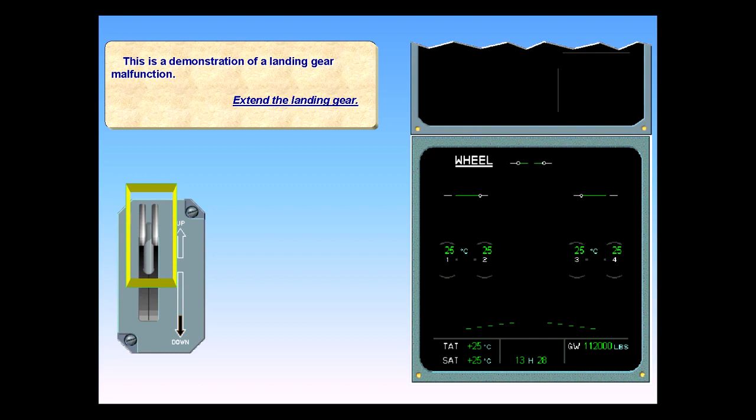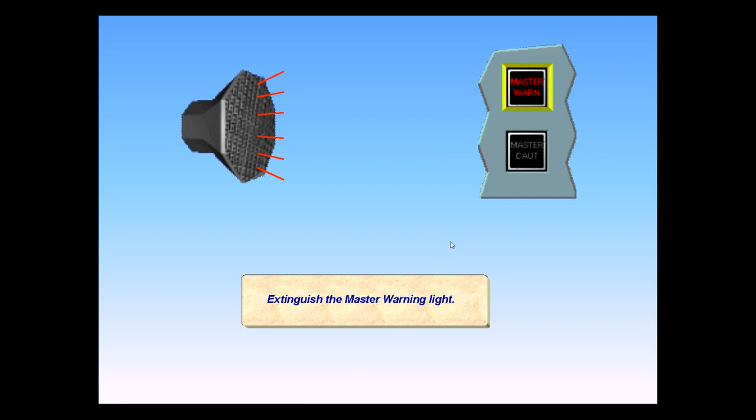Extinguish the master warning light. The left main gear did not extend and lock. On the landing gear panel, the unlocked indication is red. On the ECAM wheel page, the message Landing Gear Control is displayed amber, indicating that the gear and landing gear lever positions disagree.

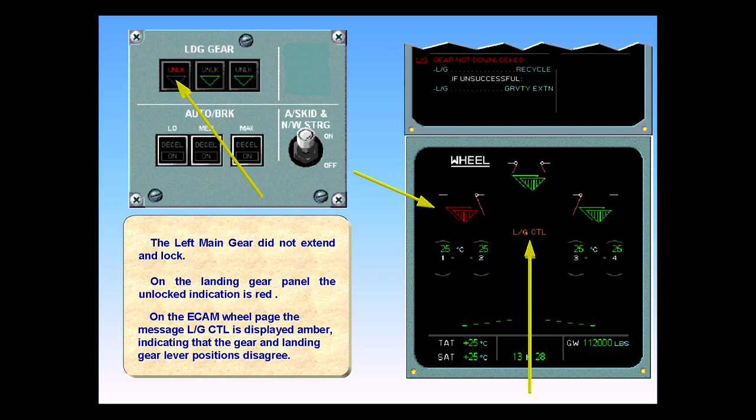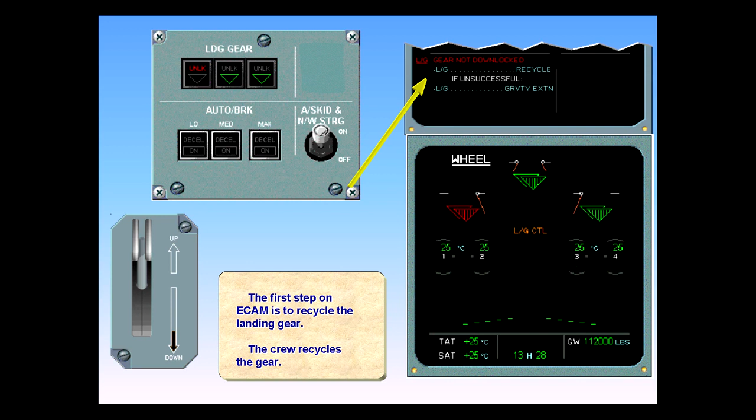The first step on ECAM is to recycle the landing gear. The crew recycles the gear. The landing gear is extended again, and the failure remains. The next action requires a non-ECAM procedure described in the flight manual. Extend the gear by clicking on the gravity extension handle.

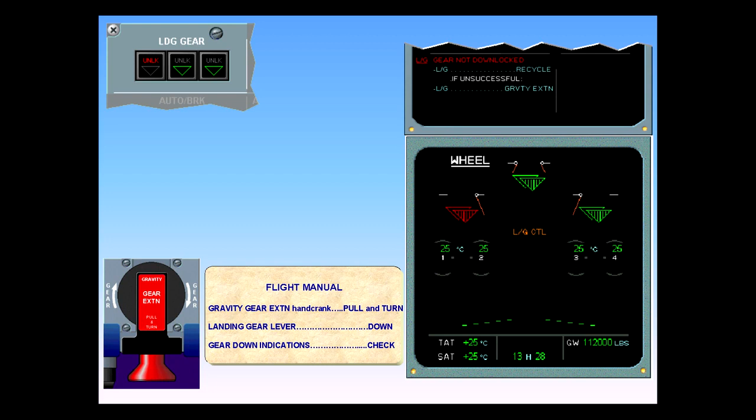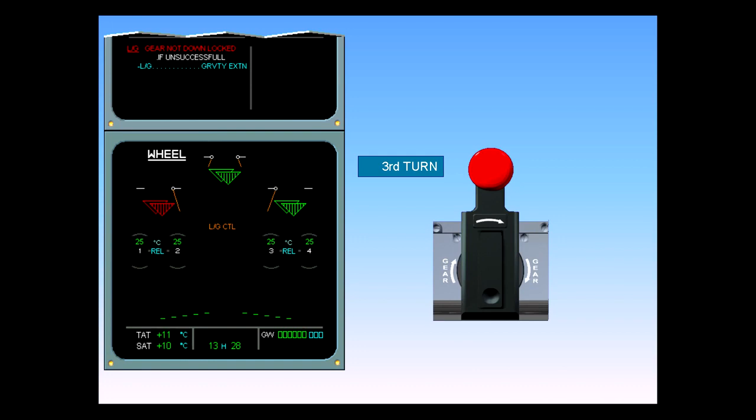The hand crank has been turned 3 times. The next step is to place the gear lever in the down position.

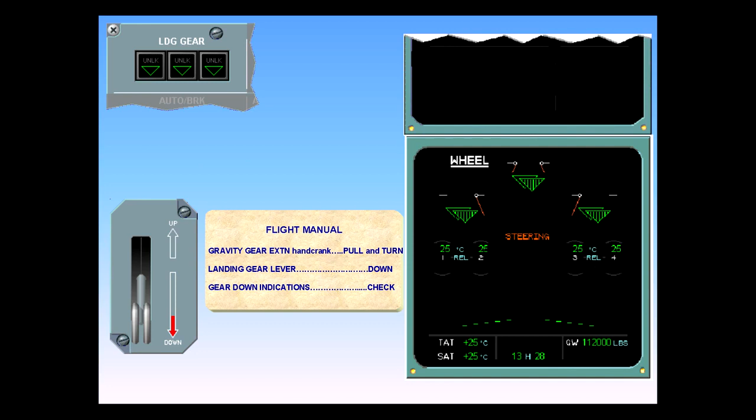Finally, check for gear down indications on the gear panel and on the ECAM wheel page. The gear is now down and locked. Note that the gear doors remain open. This is shown on the wheels page. The door indicators are open and amber.

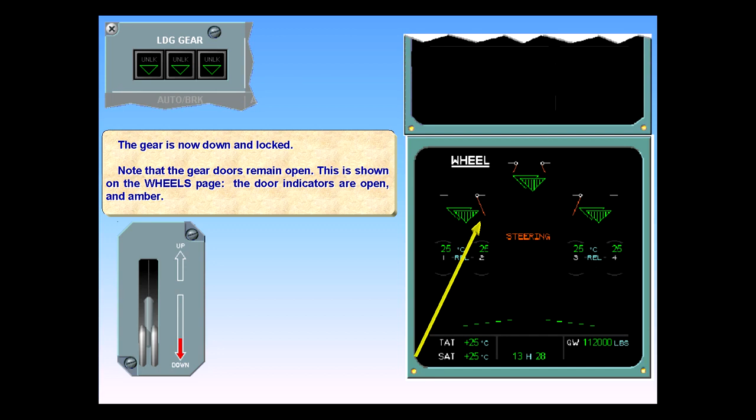The next step is to clear ECAM. Clear ECAM.

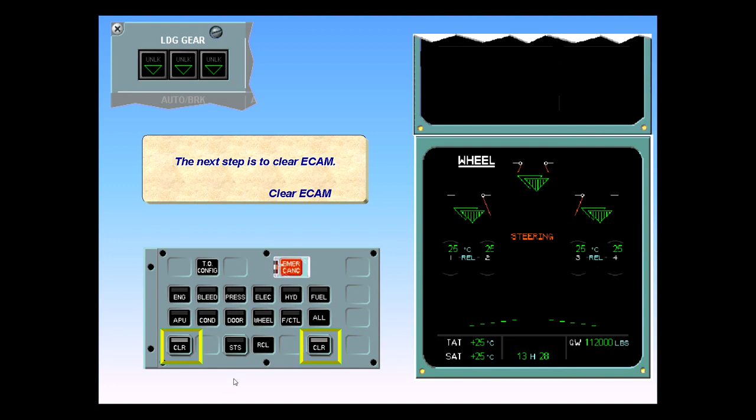The status page is now displayed. Approach Cat 3 single only is listed in the left column, indicating a downgrade in approach capability. Cat 3 dual and nose wheel steering are listed under in-op systems. Anytime a landing is made with the gear doors open, nose wheel steering is lost.

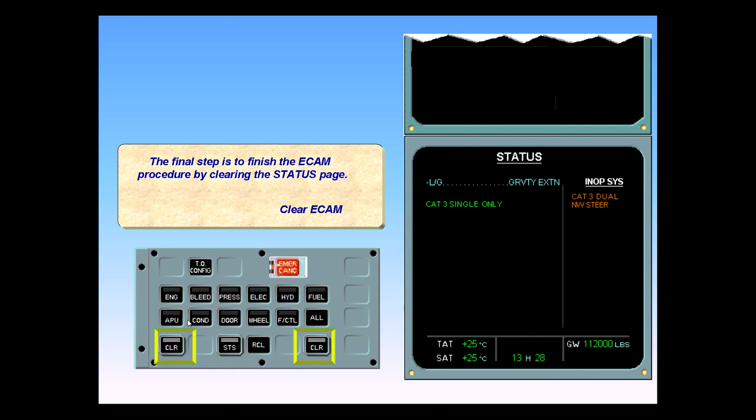The final step is to finish the ECAM procedure by clearing the status page. Clear ECAM. ECAM complete. Screens normal. Notice that the status reminder is displayed on the engine warning display.

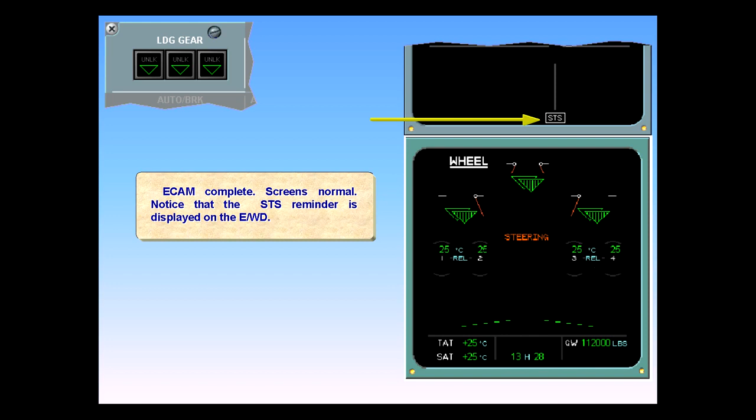Other ECAM faults will be displayed in the same manner. In this example, one LGCIU detects the nose landing gear in transit and displays the triangle in red. The other LGCIU detects the nose gear down and locked and shows a green triangle.

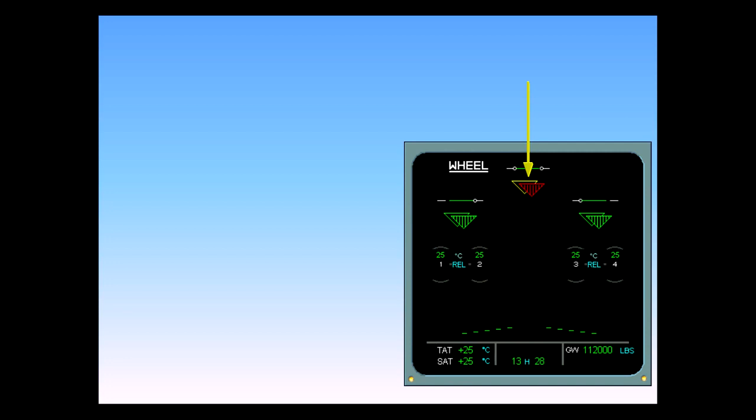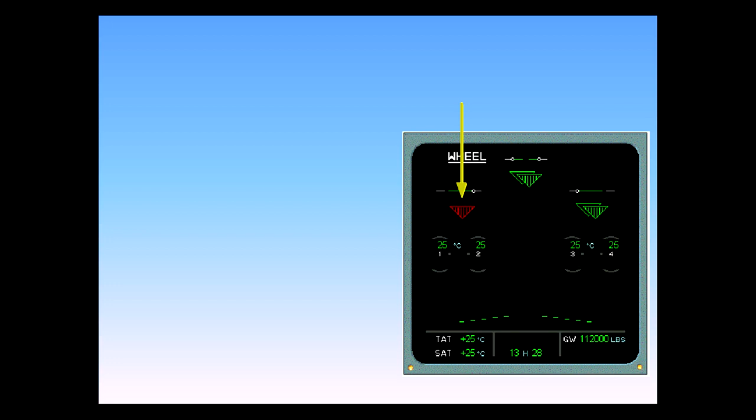In this example, one triangle is missing, meaning that the gear is detected up and locked by one LGCIU. The remaining triangle is red because the other LGCIU detects the gear in transit.

The steering message appears in case of nose wheel steering failure, a yellow hydraulic system failure, or if the anti-skid nose wheel steering switch has been turned off. It is also associated with an ECAM caution.

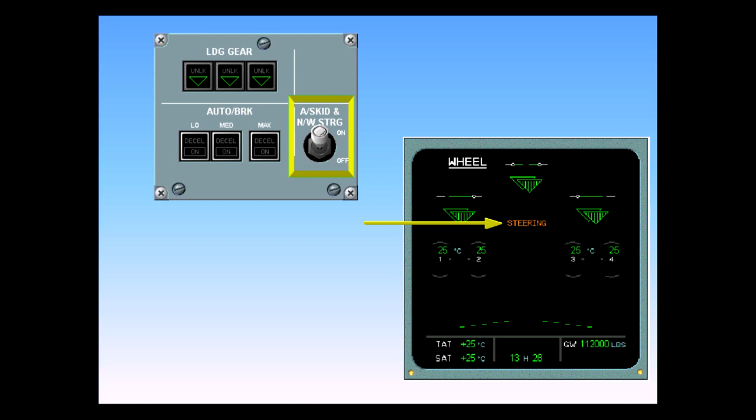This is an ECAM presentation of hot brakes. During the landing rollout, when brakes are applied, the temperatures begin to rise. Above 100 degrees Celsius, a green arc appears on the hottest wheel.

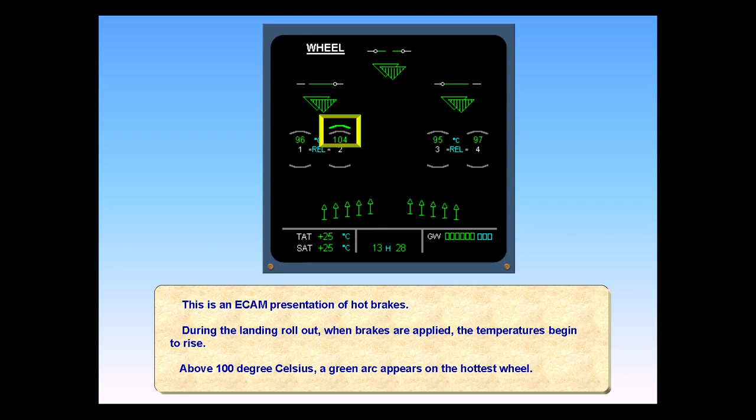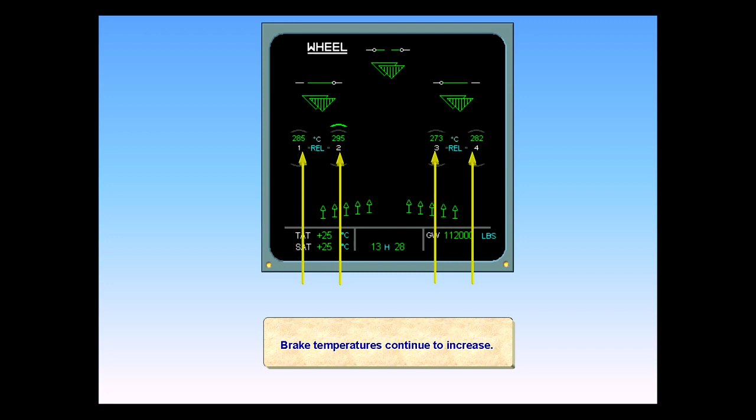Brake temperature continues to increase. You hear the chime and see the master caution. Extinguish the master caution.

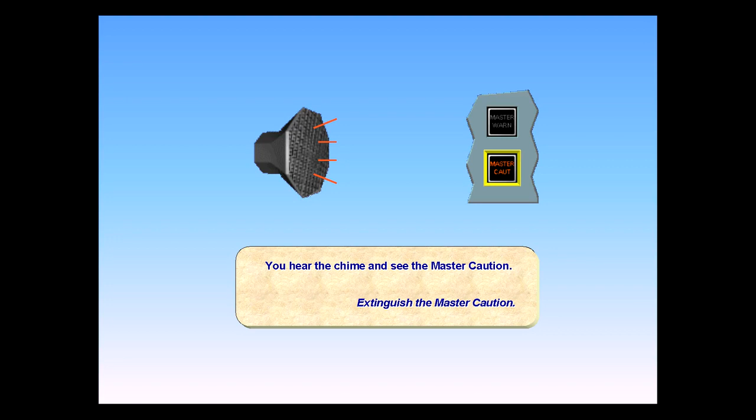On the ECAM wheel page, the brake temperatures are displayed in amber above 300 degrees Celsius. An amber arc is displayed above the hottest wheel. As long as the brake temperature is too hot, the takeoff must be delayed.

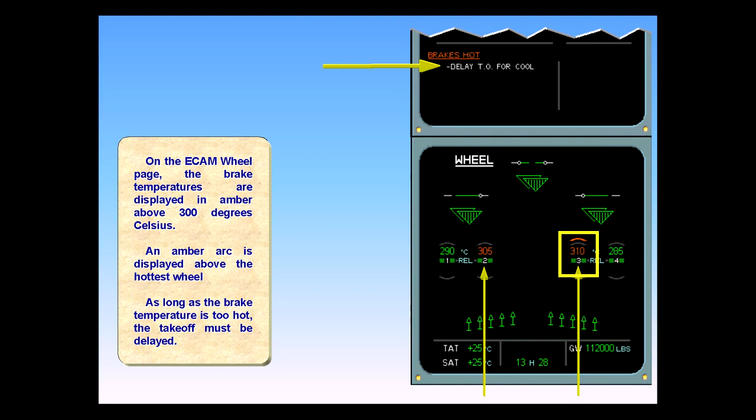The next failure will show automatic reversion to the alternate brakes. This failure can be caused by a green system hydraulic failure or by a dual BSCU failure.

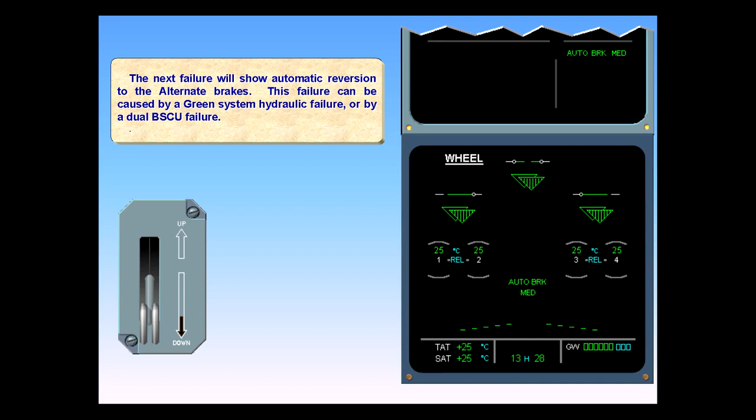The caution and associated checklist are displayed on the engine warning display. The green auto brake medium messages disappear from the engine warning display and from the wheel page. Auto braking is now lost.

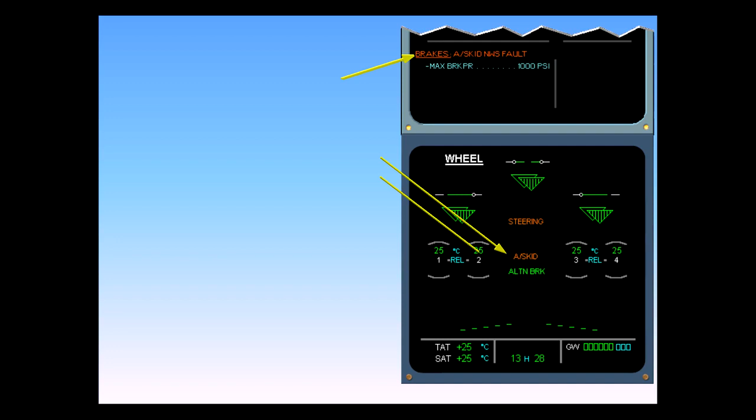On the ECAM wheel page, the message anti-skid appears in amber, indicating an anti-skid failure. Also, the message alternate brake appears in green, indicating the loss of normal braking. When using brakes without anti-skid, care must be taken not to exceed 1000 psi on the yellow brake pressure gauge.